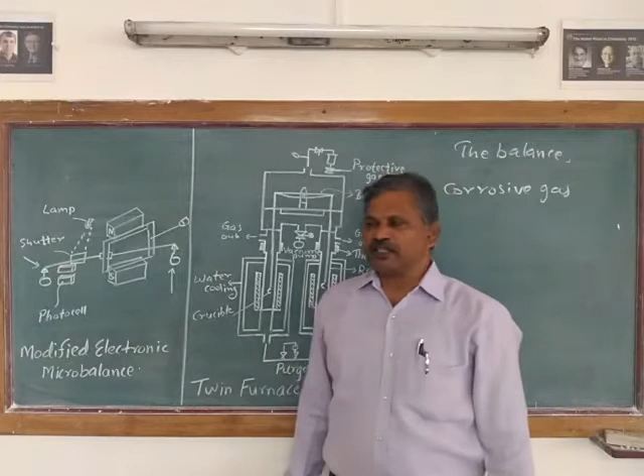The movement of gas around the sample due to convection may cause noise and affect the observed mass. This may be reduced by introducing baffles between the sample holder and the balance. Usually, experiments are conducted in a flowing atmosphere, and suitable design reduces the convective effect.

Thermomolecular flow may occur when the balance is operated at low pressure.

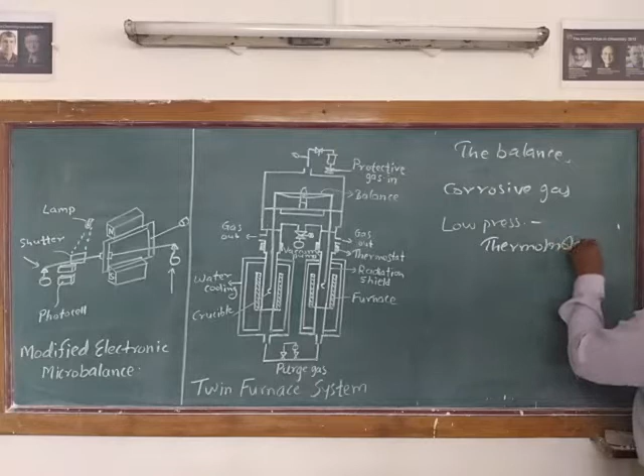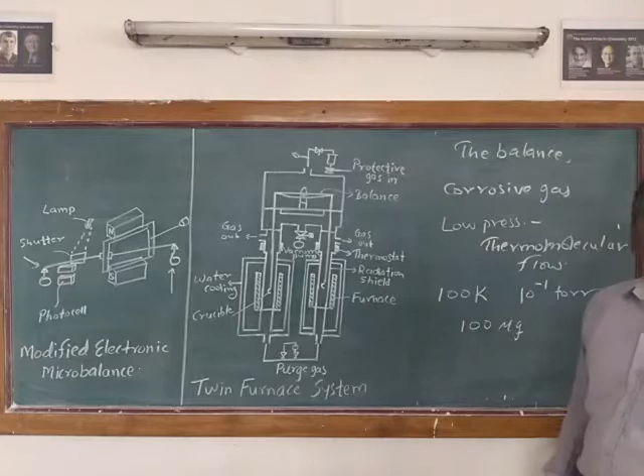If the sample or its suspension or counterpoise experiences a temperature gradient when the pressure is low and the mean free path is comparable to the dimensions of the apparatus, the flow of gas molecules can cause an apparent weight change. For example, if the temperature difference is 100 Kelvin and the pressure is 10 to the power minus 1 torr, the effect can be as much as 100 micrograms. So there may be a change in the weight of the sample up to 100 micrograms.

When a sample of large volume must be used, there is an effect due to the Archimedes principle. The Archimedes principle states that when a body is immersed in a fluid, it experiences an upthrust equal in magnitude to the weight of the fluid displaced.

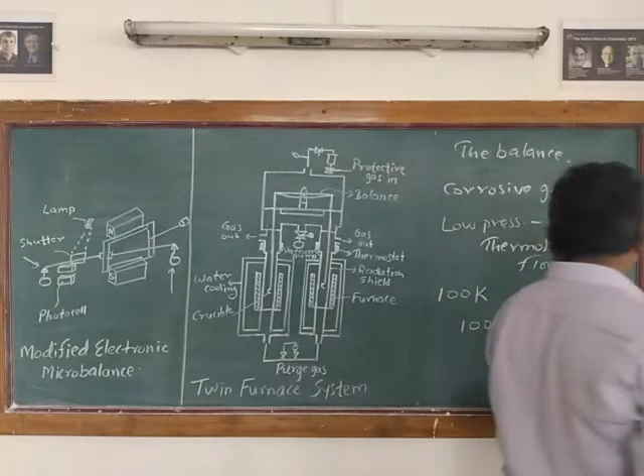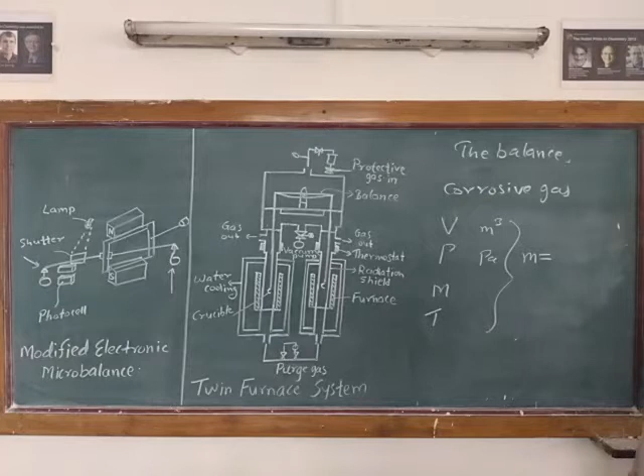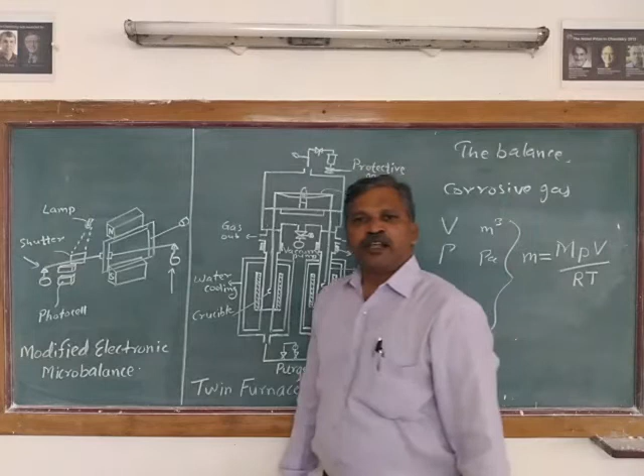That means if the volume of the sample plus sample holder is V in meter cube, and the pressure is P in Pascal, then for an ideal gas having molar mass M, the mass of gas displaced at temperature T is given by MpV divided by RT. This tells us how much upthrust is applied to the sample. As the sample is heated, the density of the gas decreases, but the density of the solid hardly changes. Therefore, the upthrust will decrease and the sample will apparently gain some measured mass.

There are several ways to compensate this effect, the gain in the mass of the sample can be avoided using different methods. Firstly, run a blank buoyancy curve with an inert sample of similar volume and subtract that curve from the experimental curve for our sample. You deduce the reference curve using the blank buoyancy curve or reference material, and whatever curve you get is called the blank buoyancy curve, which has to be subtracted from the experimental curve.

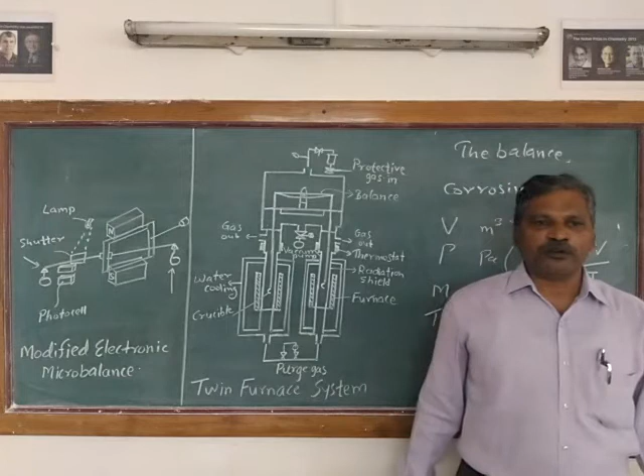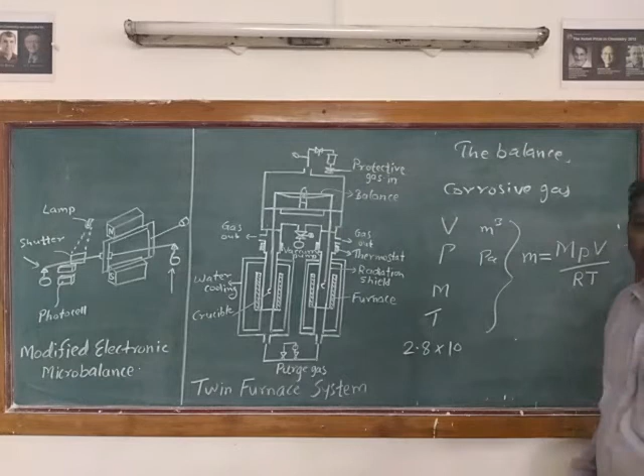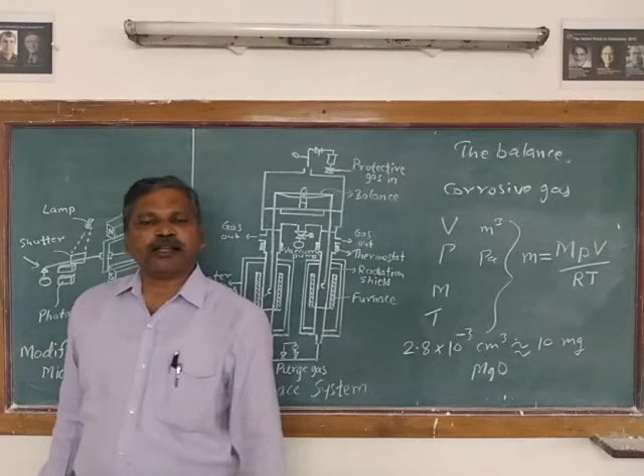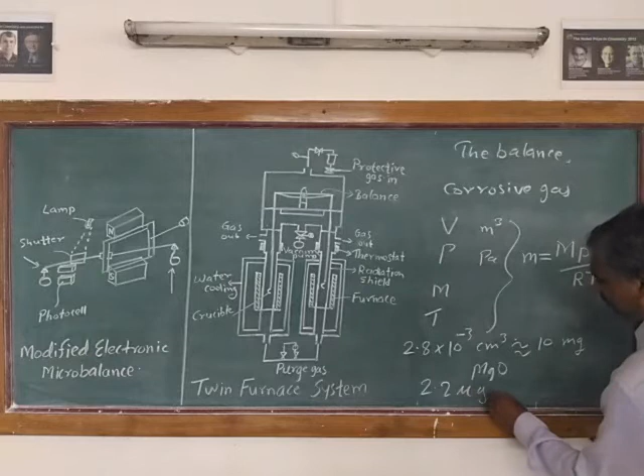Secondly, the use of very small samples and crucibles will reduce the effect, so the gain in mass will be very small if you use small volumes or small amounts of sample and crucible. For example, if the volume is reduced to about 2.8 into 10 to the power minus 3 cm cube, which is the volume of magnesium oxide equivalent to about 10 milligrams of MgO, and you carry out thermogravimetric analysis on that sample, there is an apparent gain of only 2.2 micrograms.

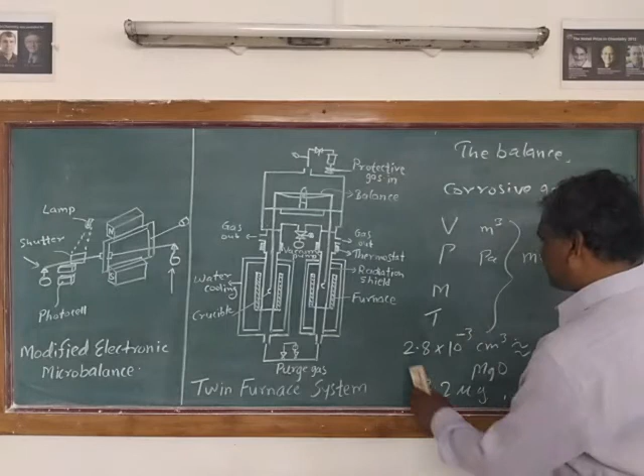Thirdly, if we use a twin furnace system where the counterpoise of similar volume is heated at the same time, the effect is largely cancelled. Here we have shown the diagram of the twin furnace system. In one pan the sample is placed, and on the other pan the reference material is placed, and both sample and reference are simultaneously heated using the two furnaces. So it is called a twin furnace system.

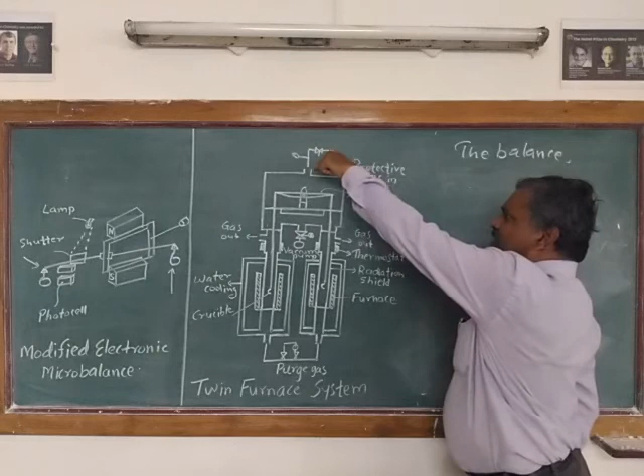Here we purge the inert gases so that corrosive or oxidizing gases get evolved and removed. From here we can insert the protective gas so that it protects our thermobalance. By using this twin furnace system, we can avoid the gain in the mass of the sample.

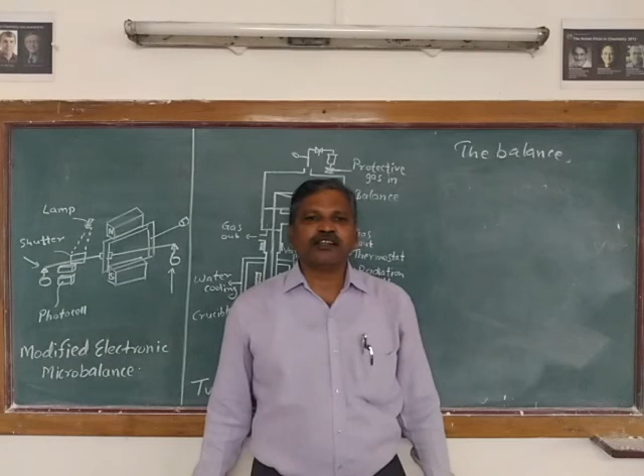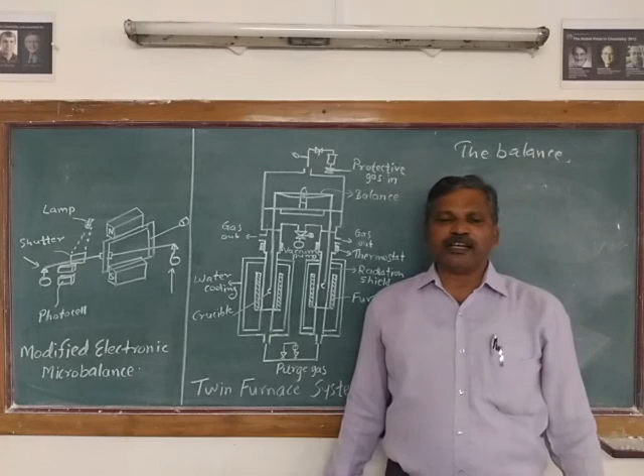Thermogravimetry in a very corrosive atmosphere may be carried out using a magnetically suspended balance. In this magnetically suspended balance, the arm of the balance goes through an electromagnet. An electromagnet suspended from the microbalance holds the glass-encased permanent magnet in the measuring cell. The sample in the furnace is connected by a suspension wire to the permanent magnet, and each mass change is transmitted back without contact. This allows the use of very reactive atmospheres, or samples which produce corrosive or toxic products, without their coming into contact with the balance mechanism. By making use of the magnetically suspended balance, we can handle the corrosive atmosphere generated due to heating the sample in the thermogravimetric analysis measurement.